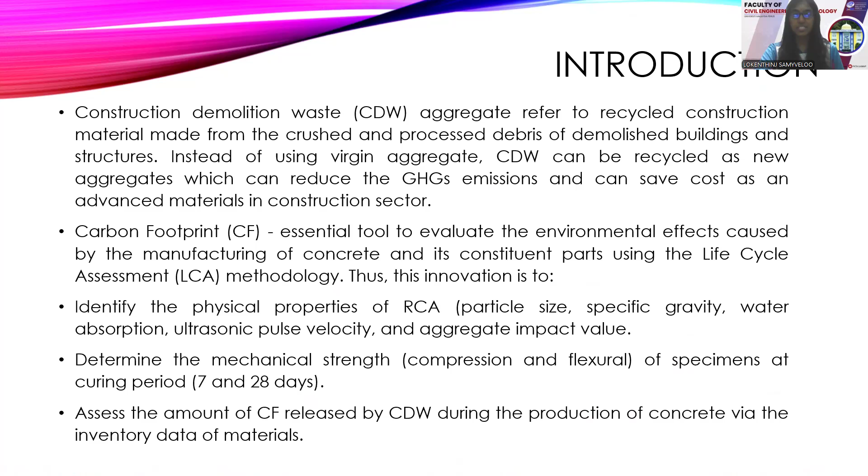Next, problem statement. There are three problem statements. The first, CDW currently produced by the construction sector is alarming in its quantities. It depletes the environmental and natural resources needed to make concrete. Due to this problem, the industry has made it a goal to find more environmentally friendly ways to make concrete. Second, CDW recycling is a possible substitute for the natural resources used in the production of aggregate throughout the last few decades.

This technique has financial benefits, such as when comparing the cost of recycled aggregates to unrecycled aggregates; these replacements contribute to savings of approximately 4 to 9 USD and 9 to 26 percent per meter square of aggregates and per meter cube of concrete, respectively. As we all know, Malaysian industry uses the grade 25 cube, sized 100 mm times 100 mm times 100 mm, and RM 10 ringgit is contributed per cube.

Third, restrictions. Concrete behaves with low strength due to the diversity and variability of the recycled aggregates' features. Therefore, it is crucial to evaluate this advanced material's suitability for application from an environmental standpoint, such as reduction of carbon footprint.

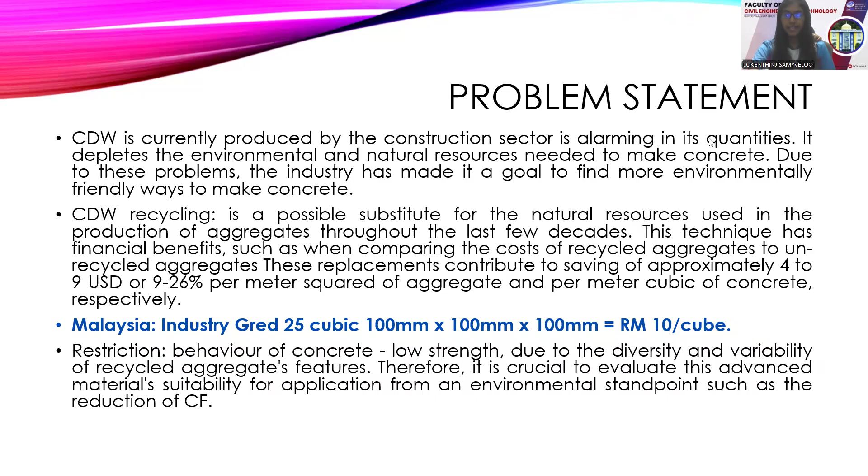Next, first, preparation of specimen, RCA. Crushed CDW was collected from a destroyed building in Kangar and carried to the FTKA lab. Second, physical properties of RCA, recycled coarse aggregate, and NCA, natural coarse aggregate. And each has its own standard method for the overall testing.

The first, particle size analysis, sieve analysis for the fine and coarse aggregates. Second, density and water absorption, specific gravity and absorption of water. Third, ultrasonic pulse velocity, called the UPV test. And fourth, aggregate impact value, AIV test.

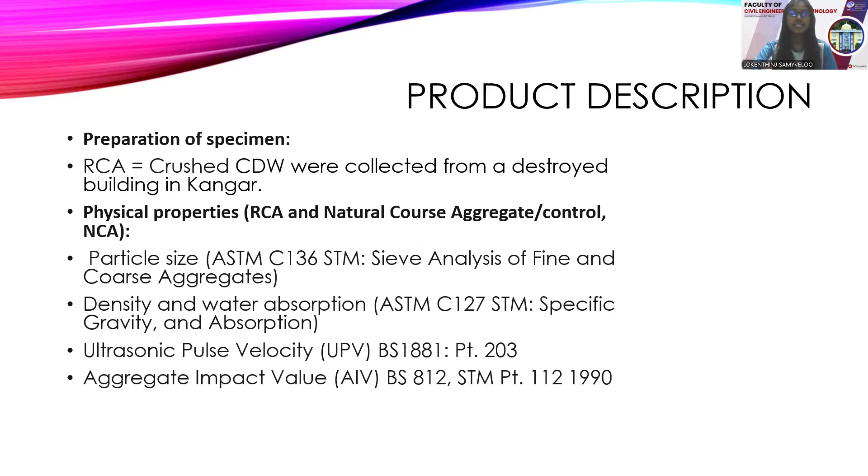Next, mechanical strength. It has two tests, compression and flexural test. Before we conduct the testing, first we need to calculate the concrete mix design. Second, we used grade 25, using cement 3 kg, water 2 kg, fine aggregate 6.41 kg, coarse aggregate 6.16 kg.

And third, tested RCA concrete; there are 4 replacements we used. First 45%, second 50%, third 75%, fourth 80%, and lastly we compare with the natural coarse aggregate, which we can call the control sample without any replacement of RCA, and they were tested for compression and flexural tests after curing 7 days and 28 days.

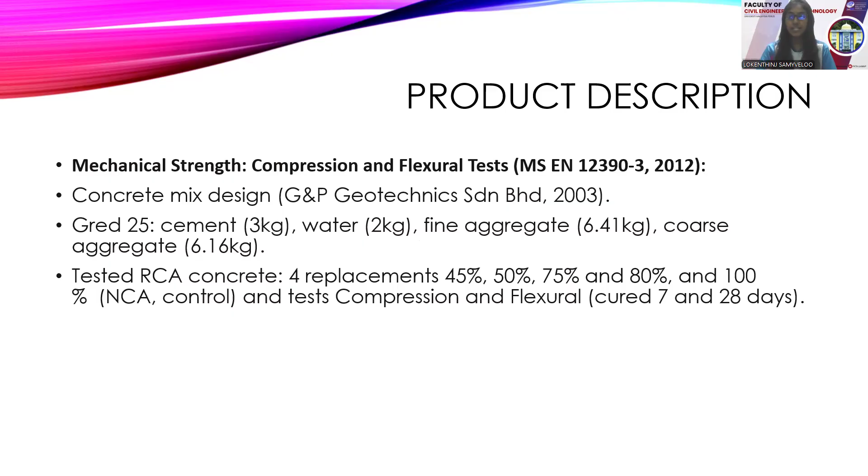Next, okay. The fourth, CF assessment, which is the carbon footprint formula: EF equals WC times EFPC plus WCA times EFPCA plus WFA times EFPFA. This is to calculate the overall carbon emission in the laboratory: quantity of materials and material emission factor, which is CO2.

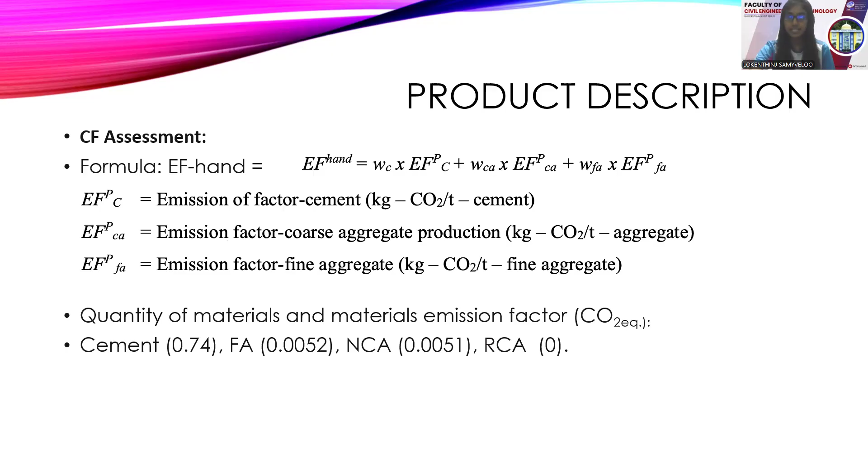And for the cement we use a total of 0.74, fine aggregate 0.0052, natural coarse aggregate 0.0051, and recycled coarse aggregate RCA is 0. Next, product description. This is the diagram.

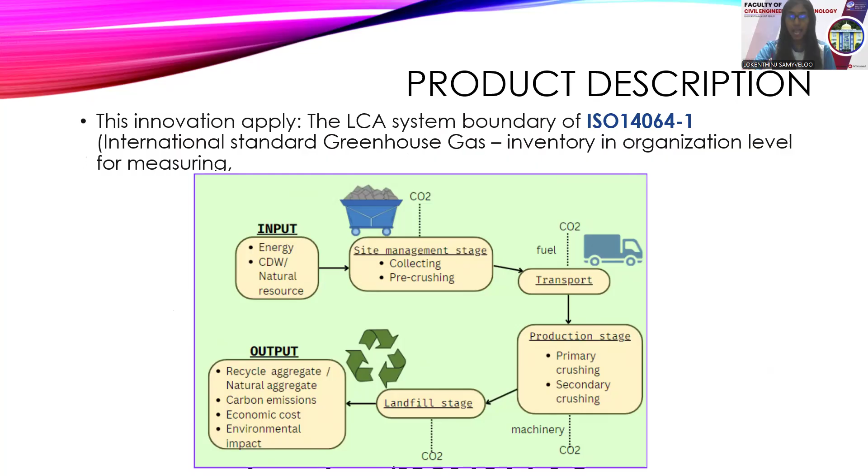With this innovation applied, the LCA system boundary of ISO 14064-1, the international standard for greenhouse gas inventory at the organization level, is used for the measuring. This diagram shows the input, the material we used, and then the overall process, and from here we can see the carbon emissions and then the output.

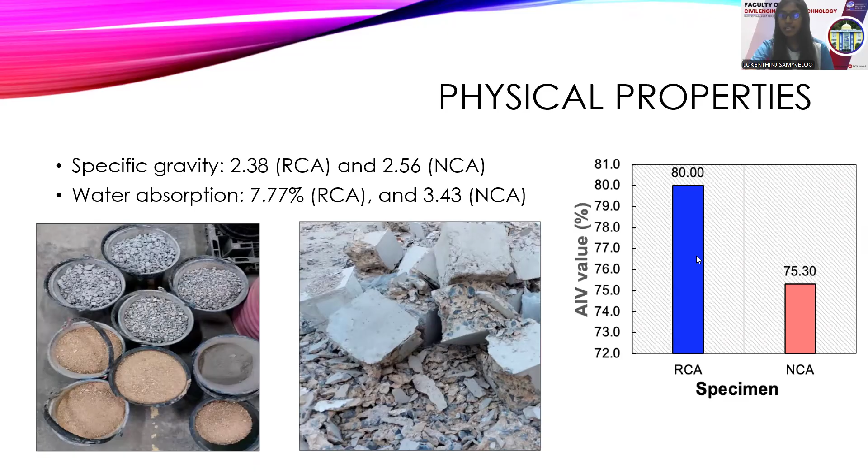Next, the physical properties. First, specific gravity: 2.38 for RCA and 2.56 for NCA. Water absorption: 7.77% for RCA and 3.43% for NCA. And this is the table of aggregate impact value, and this is the graph. RCA is greater than NCA.

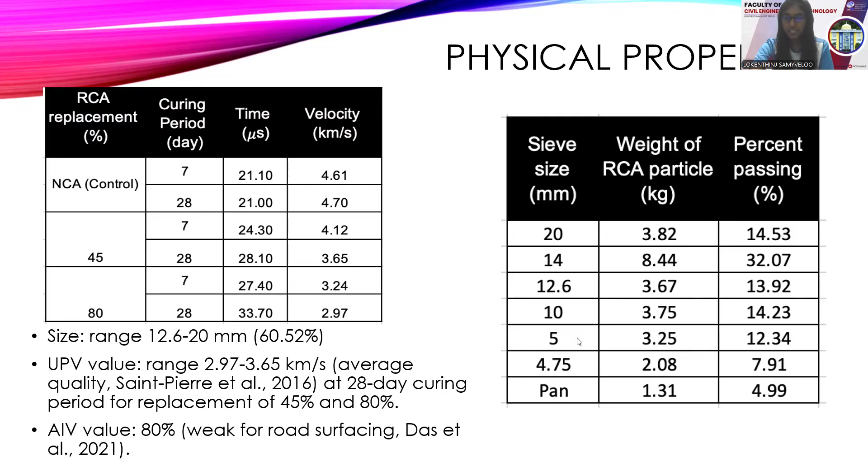It means average quality and reflects some journals, which is for the 28 days curing period. For replacement we just take the 45% and 80%. From here we can see the strength itself, and the AIV value is 80%, and these are the sieve sizes, and we also take the weight of RCA particles for each sieve size and the percentage passing.

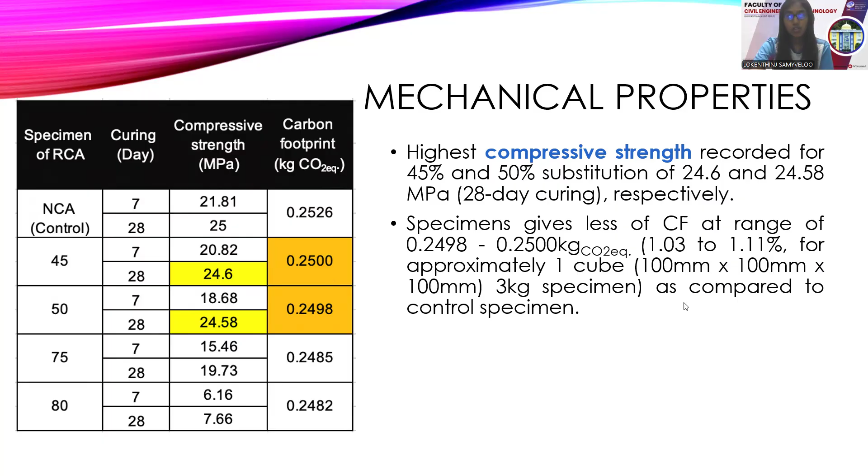After that, the mechanical properties. The highest compressive strength was recorded for 45% and 50% substitution, at 24.6 and 24.58 MPa for 28 days curing. This is the highest value for the two replacements. The specimens give a lower carbon footprint, in the range of 0.2498 to 0.2500 kg CO2 equivalent, accumulating 1.03 to 1.11%. That's approximately for one cube, sized for the 3 kg specimen, as compared to the control specimen. This will be more cost effective.

So CDW aggregates in advanced concrete reduce bending resistance while providing environmental benefits over virgin material, so the carbon emission decreases as the replacement gets higher, but the strength may reduce.

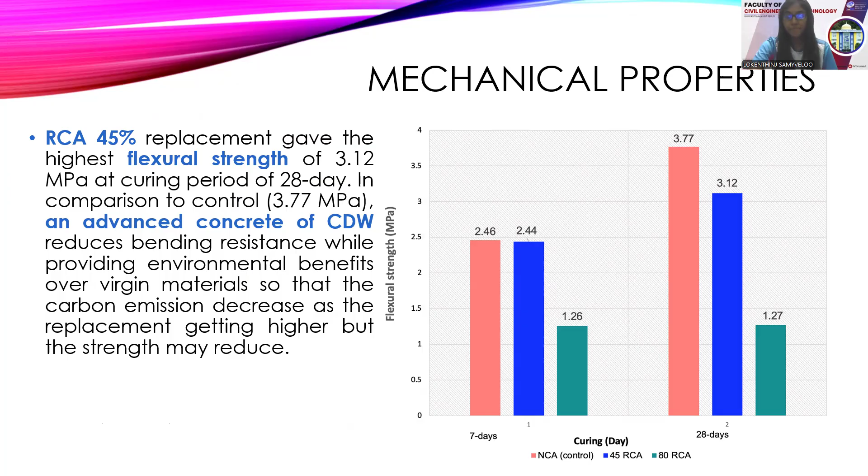Next, novelty and initiative. This innovative concrete product represents a significant advance in the construction industry by integrating recycled CDW, offering both high strength and a lower carbon footprint. Compressive strength of 24.6 MPa surpasses the standard requirement for grade 24 concrete, ensuring its suitability for structural application. Additionally, the carbon emissions from its production are reduced by 1 to 2% per 3 kg of concrete, contributing to sustainable construction practice.

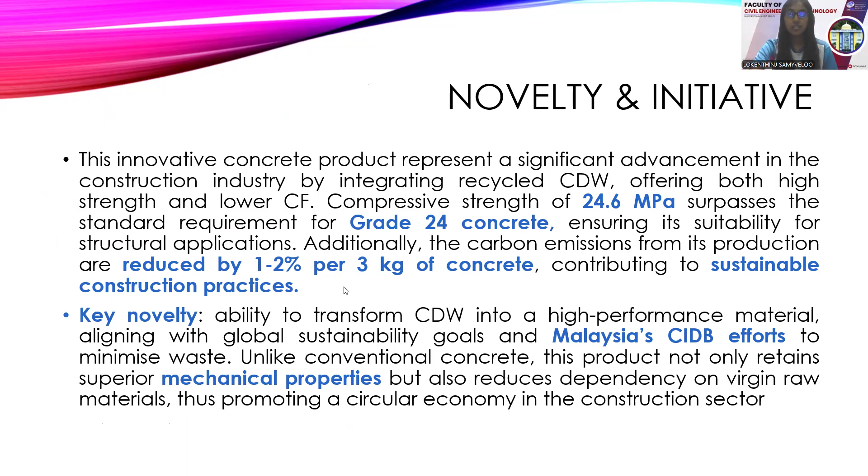It also has the ability to transform CDW into high performance materials, aligned with global sustainability goals and CIDB efforts to minimize waste. This concrete product not only retains superior mechanical properties but also reduces dependency on virgin raw material, thus promoting a circular economy in the construction sector.

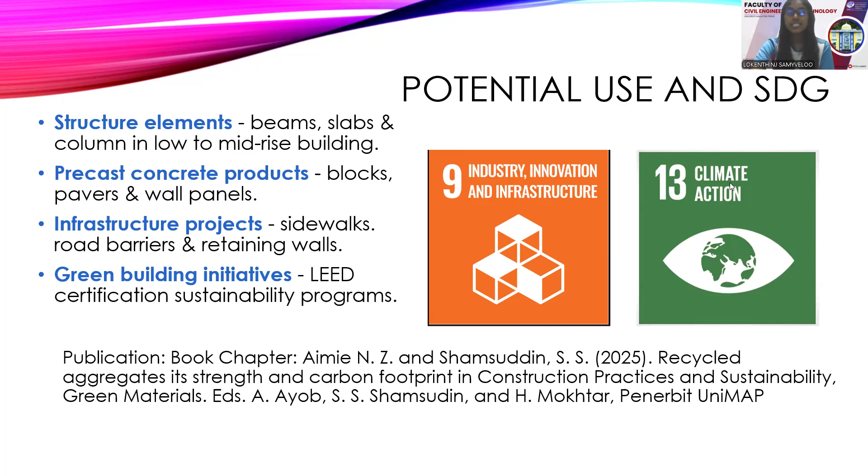For green building initiatives, there is the Leadership in Energy and Environmental Design, LEED certification sustainability program. And this innovation is mapped to SDG number 9, which is industry, innovation and infrastructure, and number 13, which is climate action.